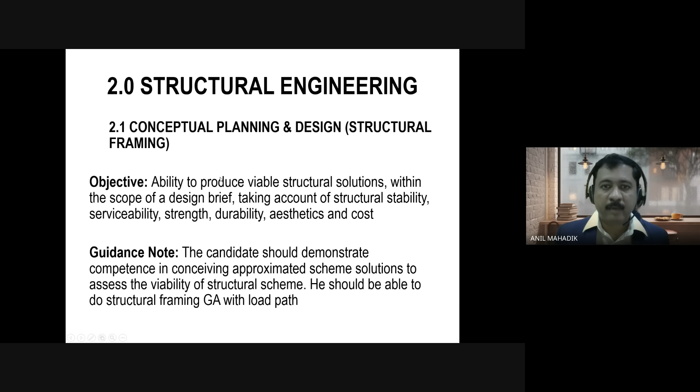During the planning, we also take care of structural stability, serviceability, strength, durability, aesthetic, and cost of the project. These parameters are very important and will be covered in the course. To understand the conceptual knowledge, you should know strength, stiffness, and stability of structures, and the IS codes used for this, which are also covered in the course.

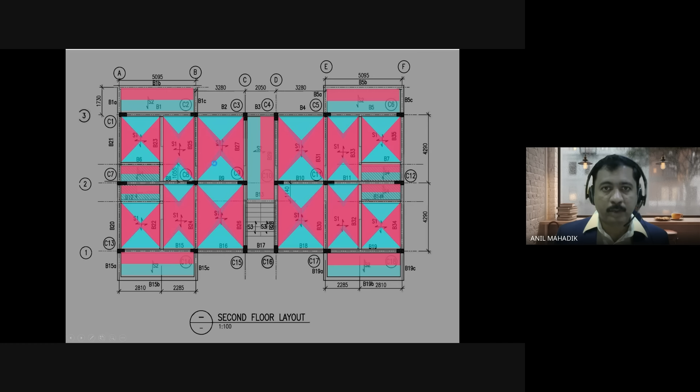Generally, we prepare such kind of conceptual GA drawings where you can see the columns and their orientations, beams, slabs, dimensions, spans, or center-to-center of columns. You can decide the load path - one-way or two-way slabs - and so on, as per IS codes.

Once you prepare these plans for different levels, you can go for the analysis of the structure. This is the second step, where generally we analyze the structure, meaning we prepare the structural model in softwares like ETABS or STAAD Pro. We apply the loads - gravity load, earthquake loads, wind loads - and analyze the structure to get the bending moment, shear forces, and axial forces. So we require some IS code knowledge for loading.

This analysis forces are required for design of the members. To understand the analysis, you should know what is meant by deflection in the structure - for vertical loads, how the frame will deflect; for lateral loads, how the frame will deflect, and where is the tension, where is the compression, where you will provide reinforcement, and so on. This basic knowledge is important.

Also, regarding the boundary conditions or supporting conditions, the behavior of the structure changes. If it is a pin support, the behavior is different; if it is a fixed support, it is different. That knowledge is also covered in the course.

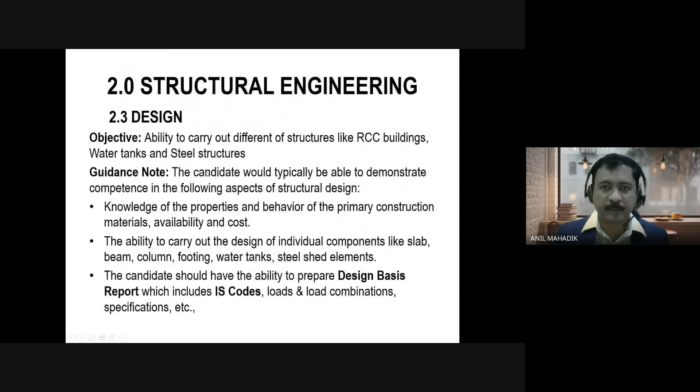Once you know the frames, you can also apply that knowledge to multi-story buildings, and that knowledge will help you draw the bending moment and shear forces required for design - these basics are also covered in the course. You can also get the bending moment from softwares or from charts. Generally, before softwares, people used to take help from charts available in books and courses. Then comes the design of the structures.

Design of the structures means in RCC buildings, we design beams, columns, slabs, and footings. In water tanks, we design columns, footings, walls, raft slab, top slab, partition walls, and so on. In steel structures, we design tension members, compression members, trusses, columns, beams, channels, I-sections, angles, and connections - welded and bolted. So this is called design.

For design, you need to understand the IS code clauses for different structures, which are also covered in the course. In our course, we are covering three methods of design: first is manual calculation method, second is design by Excel programs, and third is design by softwares like RCDC and STAAD Pro.

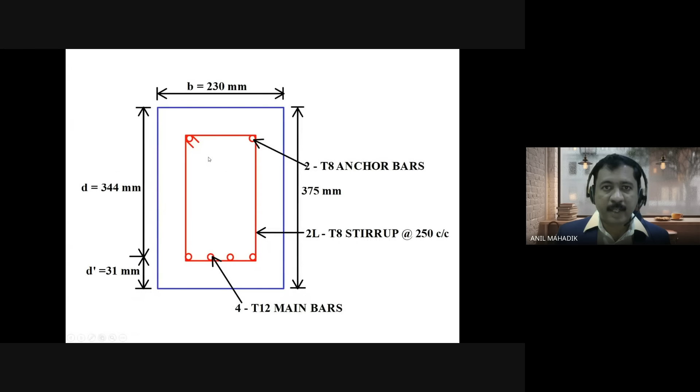Manual calculations are important to understand the concepts of design, steps of design, then detailing of the reinforcement for beams, columns, and other members. That is also covered in the course, manual calculations. This will also help you understand the IS code clauses used for different designs.

We will also cover how to prepare the design basis reports, which are required for projects, where generally we give the information regarding the project, number of storeys, then location, dimensions.

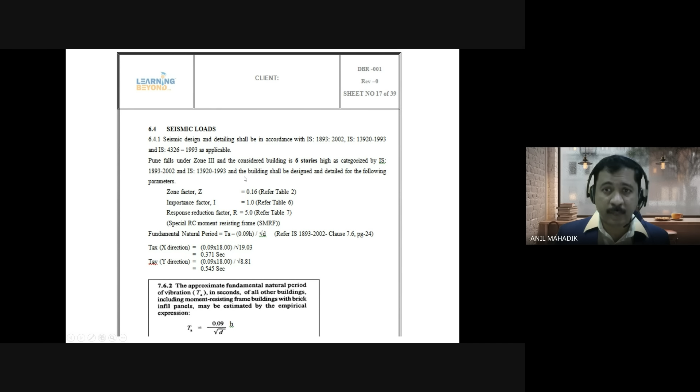Then we will also cover the earthquake engineering part, which is required for structural design - IS codes used for earthquakes, static analysis, and dynamic analysis like response spectrum analysis. This is also covered in the course.

Once you design the members, you can prepare the structural drawings in AutoCAD or REVIT software. We will cover how to prepare structural drawings in software. In structural drawings, we use the software along with engineering detailing concepts learned from IS codes. So our training course is not only a software course, but an engineering course - software, basic concepts, and engineering details.

Now, software doesn't understand how to draw these drawings. Software will help you draw the lines, dimensions, text, tables. But to draw the engineering drawing, you should know these reinforcement details as per IS codes - lap length, lap locations as per earthquake codes, hook length, and so on. There are many detailing requirements, curtailments, and so on.

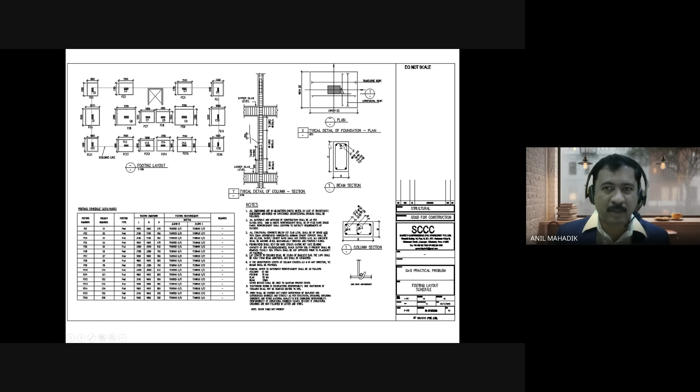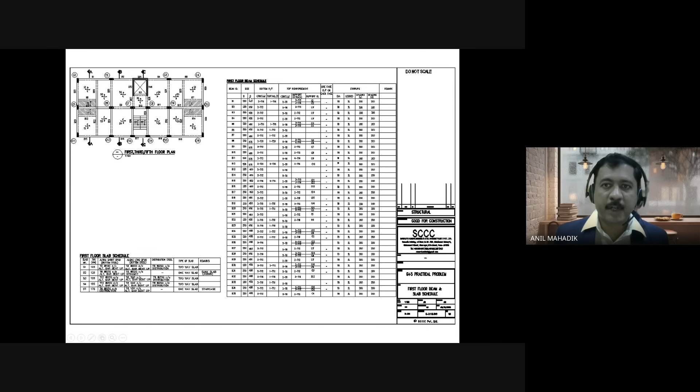These are examples of the floor drawings where you can see the layout of the beams, slabs, and columns, schedule of beams, reinforcement, stirrups, schedule of slabs. These are used for construction.

Now, our major career part is up to this point as a structural engineer. Once you prepare the drawings - foundation drawing, plinth beam drawing, floor drawings, water tank drawings, there are different structural drawings - you can send these drawings to the site for construction.

Now, the contractor's team and site engineers will do the construction on the site on the basis of architectural drawings and structural drawings. As a structural engineer, you should know the basic concepts regarding the construction sequence - how they do the construction, shuttering, formwork, bar bending, and so on. So those basics are also covered.

Once you know how to design new structures, you can do the structural audit of old buildings. So in our course, we will cover some basic concepts regarding structural audit, stages of structural audit, and also some case studies of projects.

In structural audit, there are 3 stages. One is visual inspection, second is NDT test, and third is core test. So how to use these tests for analysis, we will cover that in the course - rebound hammer, ultrasonic, core test.

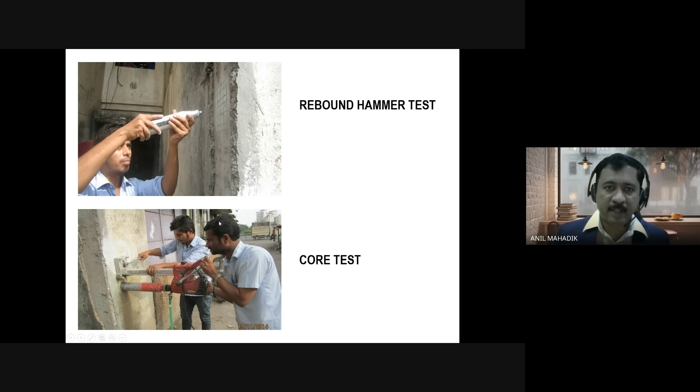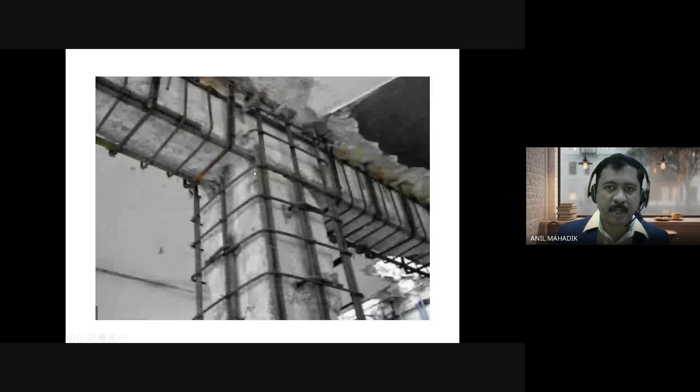Once you do the test, you can do the analysis of the structure again for existing structures and check whether the members are okay or not. And if you find any problems in the member capacities, you can do repairs and retrofitting on the basis of your structural engineering knowledge. So you can increase the capacity of columns, beams, slabs.

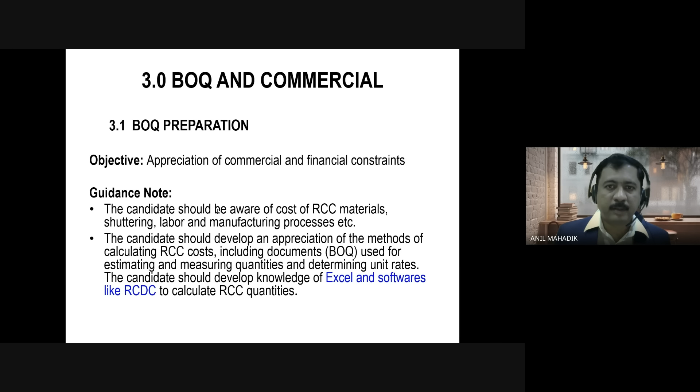Then BOQ and the commercial part is also important for structural engineers. For tender documentation, BOQs are important. So generally we prepare the BOQ of our system - it may be quantity of concrete, reinforcement, PCC, excavation. BOQ can be prepared using Excel or software like RCDC. That is also covered in the course.

Other discipline knowledge is also important. We are dealing with structural engineering projects, meaning there are many consultants involved in the project, and we require some data from these people.

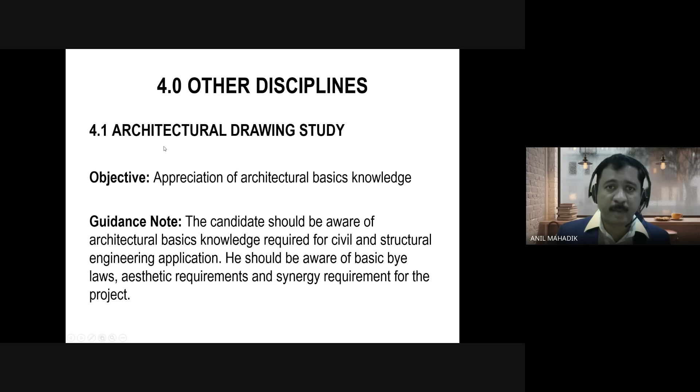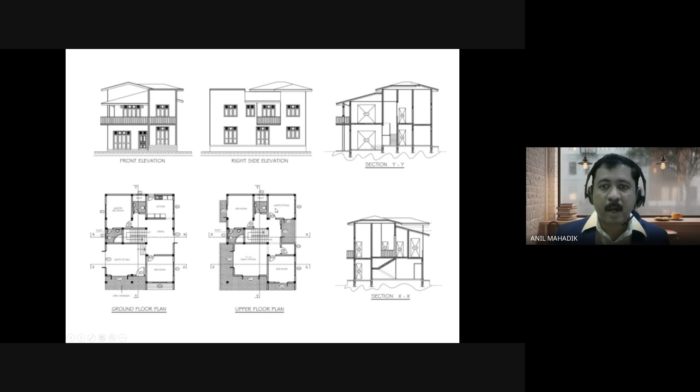For example, architects give you architectural drawings, and we prepare the structural drawings on the basis of architectural drawings. So how to read the architectural drawings, how to use their data, how to decide the loads, live loads, how to decide the column locations as per the architectural drawings - that is very important. So we coordinate with the architects. How to coordinate with them, how to study the drawings, that is covered in the course.

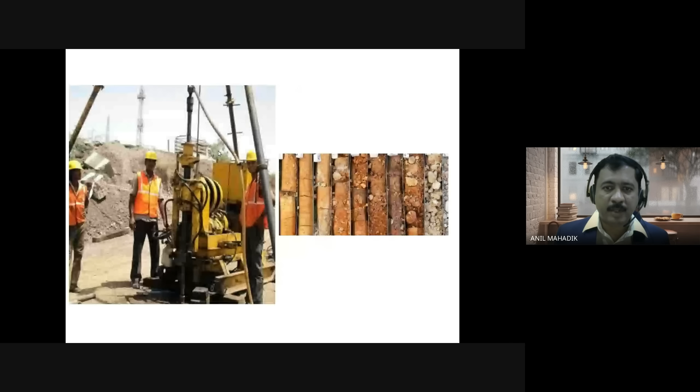Then we also need geotechnical reports from the geotechnical consultants, which are used for foundation design. Generally, geotechnical reports have safe bearing capacities, water table data, level of hard strata, bore log data, which are used for foundation design, deciding the level of the footings, and so on.

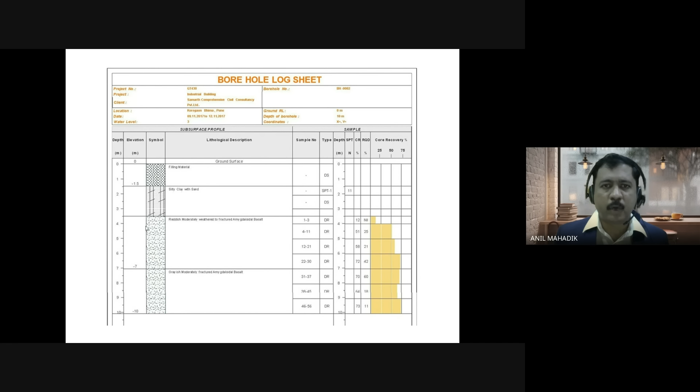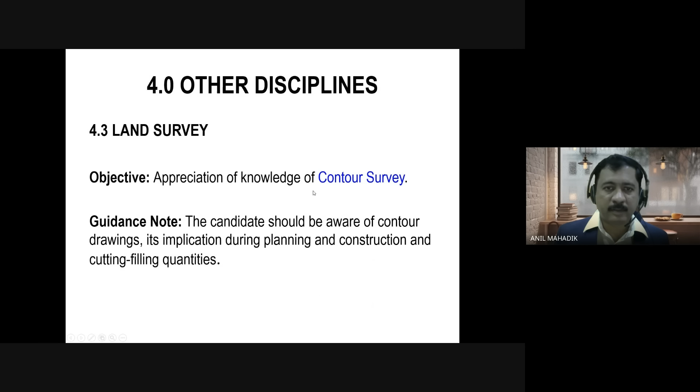There are many aspects which we can learn from the geotechnical reports, and that is also covered in the course. Also, we need to understand how to read the contour drawings, or contour survey drawings. These are used by architects, structural engineers, and contractors, so how to study these drawings and how to use them for our project, that we can learn in the course. Then we will learn a lot of softwares in our training course.

For example, you will get training on ETABS software from basic to advanced level, including practical projects of RCC buildings and high-rise buildings. In ETABS, you will also learn how to apply earthquake loads, wind loads, gravity loads, live loads, how to prepare the models, and how to get results like bending moment and shear forces, which are used for design.

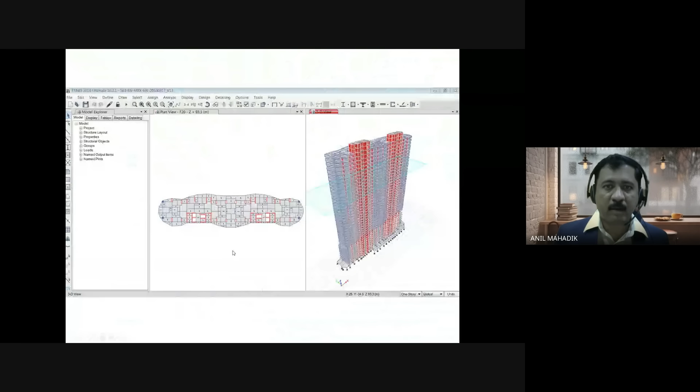This training is also covered. These are the ETABS models of high-rise buildings, ETABS results of bending moments, and ETABS results of mode shapes, which come from the response spectrum analysis or dynamic analysis.

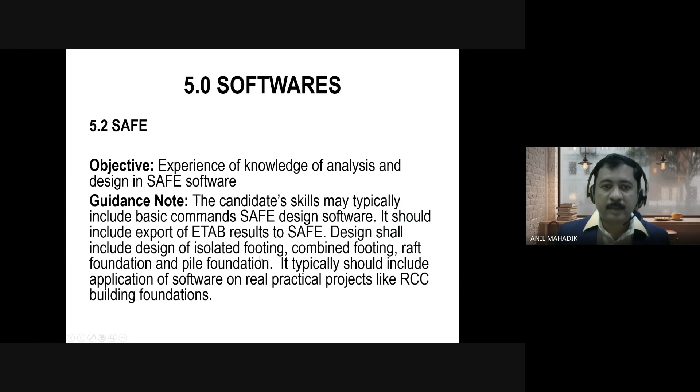That is also covered. We will also cover software training on SAFE, which is used for foundation design, like isolated footing, combined footing, and raft foundations. So this is also covered in the course. These are the SAFE models.

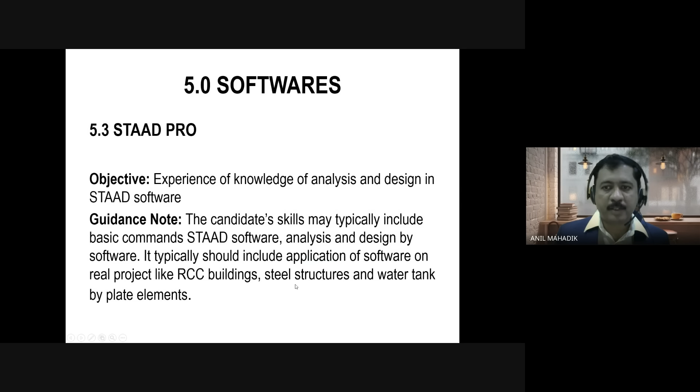STAAD Pro software is also covered. Generally, we use STAAD Pro software for industrial projects, industrial sheds, and water tank analysis. It can be used for RCC buildings also. In our course, we will use STAAD Pro software for industrial sheds, analysis, and design. So you will get training on STAAD Pro, basic concepts, advanced concepts, and practical application on projects.

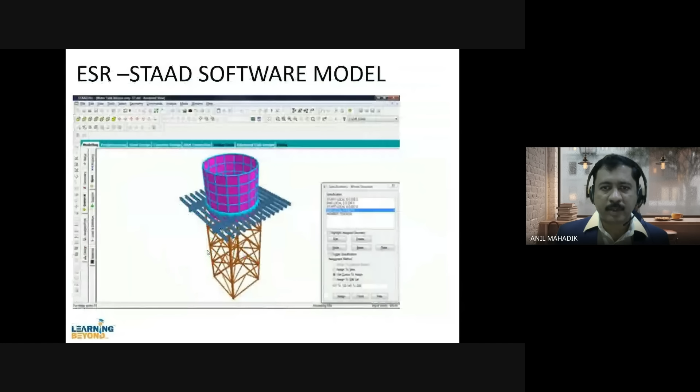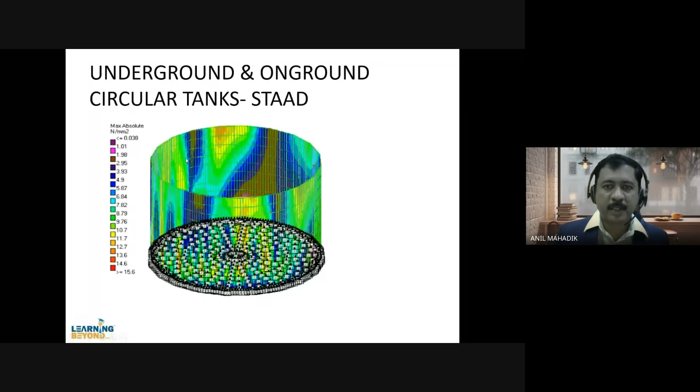These are the water tank models, ESR models, underground tanks, rectangular shapes, circular shapes. So how to study, how to model the water tanks, how to apply the loads, water load, soil loads, and how to study the bending moments from the stress contours, that you will learn.

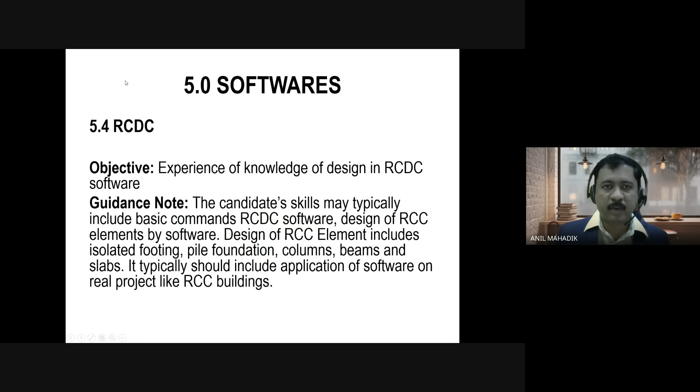RCDC software is also covered in the course, which is used for design of beam, column, slabs, and footings. In RCDC, generally what we do is transfer the results of ETABS or STAAD Pro into RCDC, and you can design these members. You can get the calculation report from the RCDC software as per IS codes.

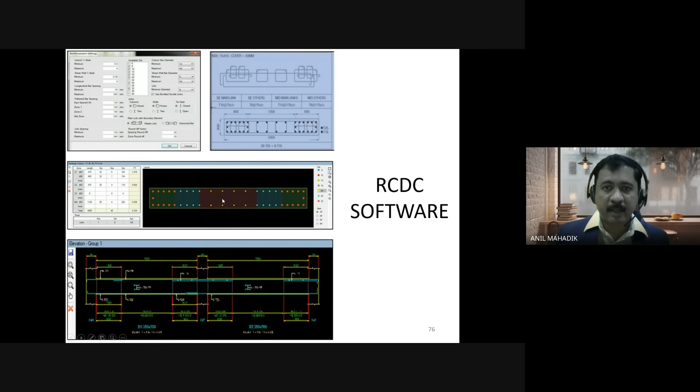You can get the calculation reports. You can also get the drawings from the RCDC software, detailed drawings, reinforcement detailing, curtailment, hook length, and stirrups, and so on. You'll also get the bar bending schedule from RCDC and quantity estimation from RCDC. This is also very important software for structural engineers.

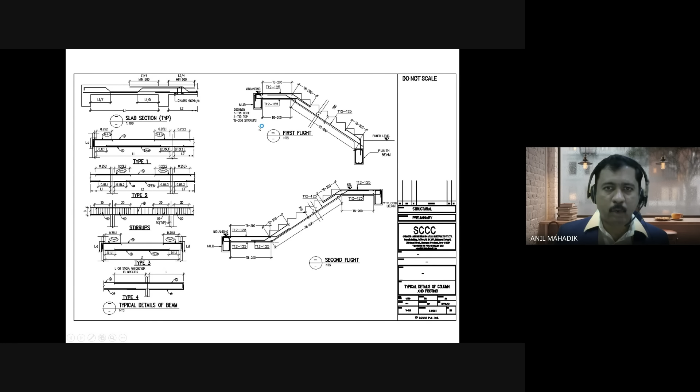You'll also get training on AutoCAD software, where you learn how to prepare drawings from basic level. Even though you don't know AutoCAD, you can learn in our course. You'll also learn the engineering detailing part, like this.

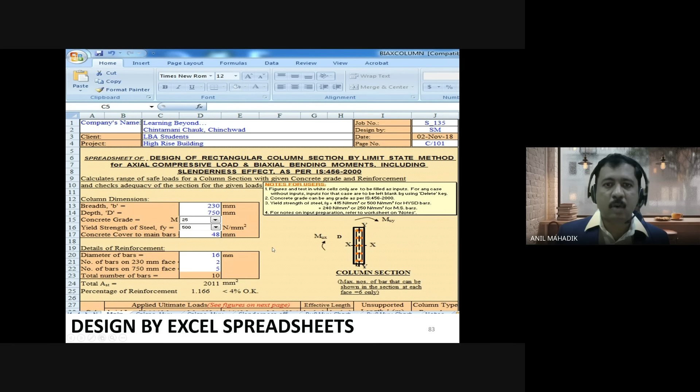Apart from other softwares, we will also cover how to design members using Excel programs or spreadsheets. You can design beams, columns, slabs, footings, water tanks, steel structures, and so on. In the Excel program, we put the sizes of the members, grade of steel and reinforcement or concrete. You can put the assumed steel, the forces coming from the software analysis, and then check whether the design is okay or not. That is the use of Excel programs.

Then we will also cover Adobe professional software, which is generally used for communication purposes. You can comment on the drawings, reports, BOQs, and so on, and even photographs, because these comments are required for communication purposes. Then we will cover different practical project applications on the softwares in our course.

Then you will get the overall experience - basic concepts, softwares, and practical projects.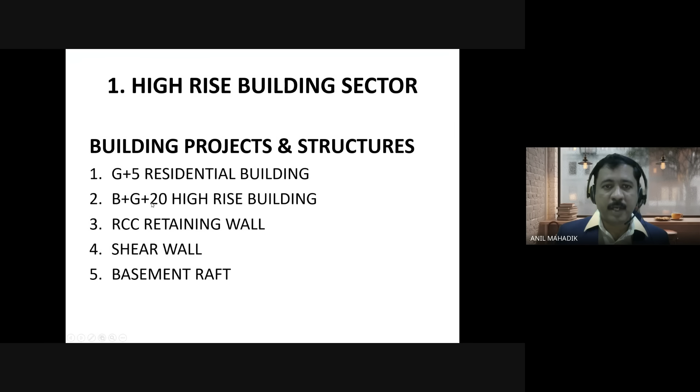Thus, in our high-rise building sector, we will cover these 5 projects: 5-story residential building, 20-story high-rise buildings, retaining walls, shear walls, basement raft. In the industrial sector, we will cover industrial sheds, analysis and design, gantry girders, trusses, canopies, mezzanine floors, PEB structures. And in the water sector, we will cover underground tanks, fire tanks, overhead tanks, ESR clarifiers. So these are the types of projects: residential building, high-rise buildings.

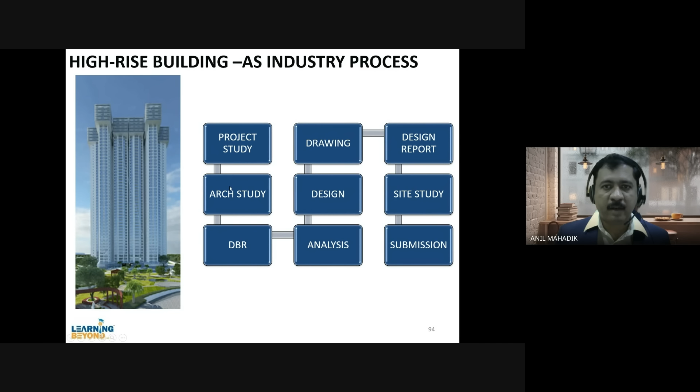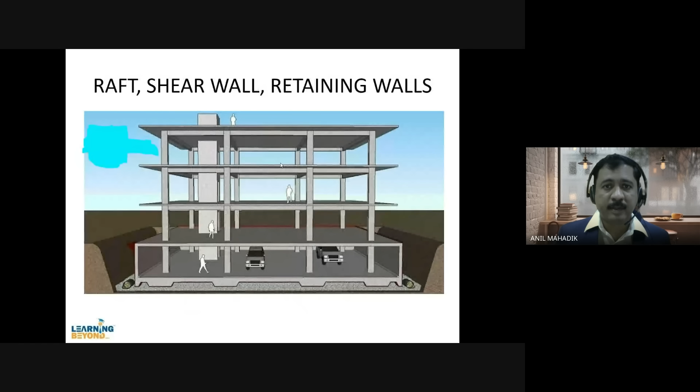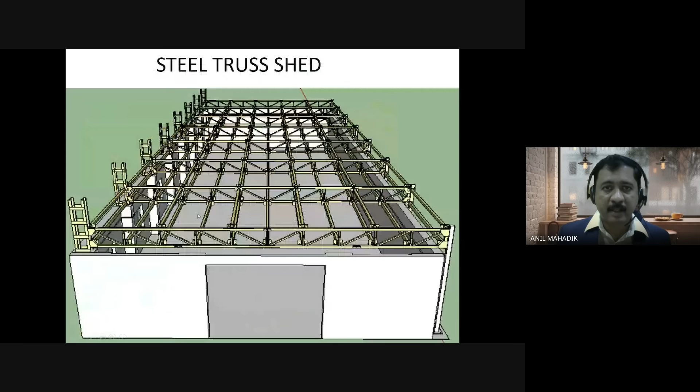As per industry process, we will cover our training course. Industry process means the way we work in the industry for clients - retaining walls, practical projects, analysis design drawings, shear walls, industrial sheds, practical project you can analyze in STAAD Pro, base plate design, connection design, gantry girder design, crane girder design, and different types of trusses which are used in industry.

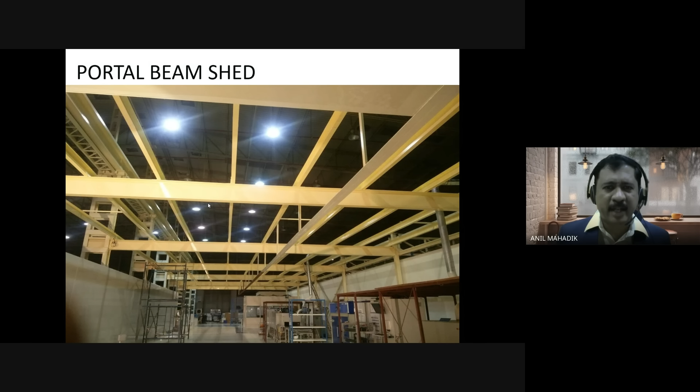And portal beams, where you will learn how to design the I-section, channels, and angles. So there are different types of members and structural systems. Once you know different systems, how to analyze and design, then you can do any type of project. That is the aim of our training course. Get the total knowledge. Nothing is missed here.

Mezzanine floors, which are used in industrial projects, generally they are done in steel beams, columns, and deck floors with concrete. This design is also covered in the course.

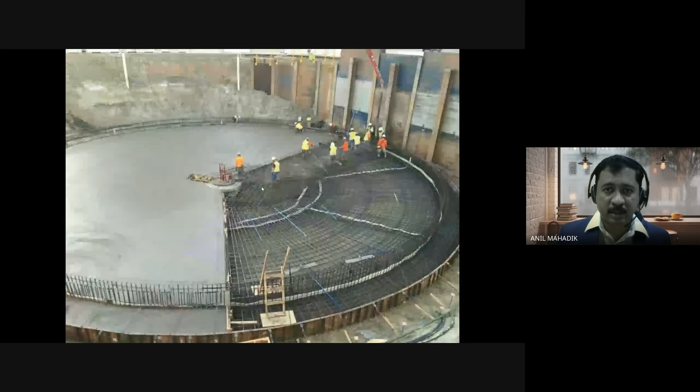Entrance canopy design is covered in steel structures. Clarifiers, which are used in sewage treatment plants, how to analyze and design these structures, that is also covered. ESR is also covered.

Water tanks, underground tanks, rectangular shapes, circular tanks, and overhead tanks on the building. So these are the types of projects which are covered in the course. Then you will get the total experience which is required to become a successful structural engineer.

Most of the things are really not covered in education. So definitely it requires some industry experience, which we are trying to bridge up here. You will get all the knowledge which is required to become a structural engineer. Now, that's why we are here. Learning Beyond will help you to get the knowledge and experience required in a structural engineering career, and you can get that knowledge through our 6 months master's course, which is available online.

So the training is online live. The trainers are there during the sessions, so you can ask the questions to them. You can get the training from the training experts.

Okay, so let me summarize the industry course content, what we are covering in our 6 months master's course. Whatever we discussed till now is covered, but let me summarize again. In softwares, we are covering these 7 softwares: AutoCAD, ETABS, SAFE, RCDC, Excel, STAAD Pro, and Adobe Professional. Every software is important and its use is also different.

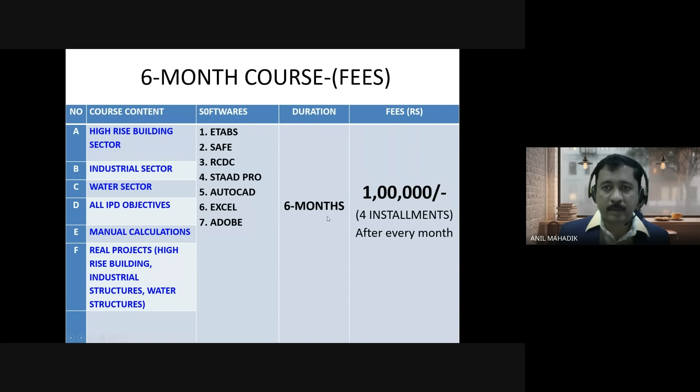Whatever softwares we discussed, 7 softwares, all these 3 sectors, manual calculations, practical projects - we are giving you all this in 1 lakh rupees. And you can pay this in 4 installments also. So this is really, really a worthwhile investment for your career.